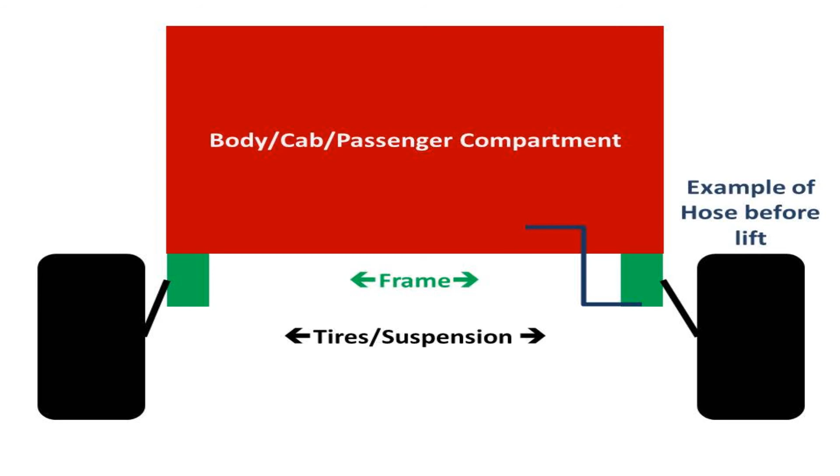You also have a little blue zigzag line there, and that's representing a generic hose that could be attached to something on the frame rail and also something that's attached to the body. So now I've jumped ahead to the next graphic here, and you see you still got the body and cab represented by the red block, but now instead of the green frame directly next to it, you have the blue blocks. And those are representing the body lift pucks, or body lift blocks as some may call them. So you're actually putting a spacer, a physical spacer, between the body and cab and the frame rails.

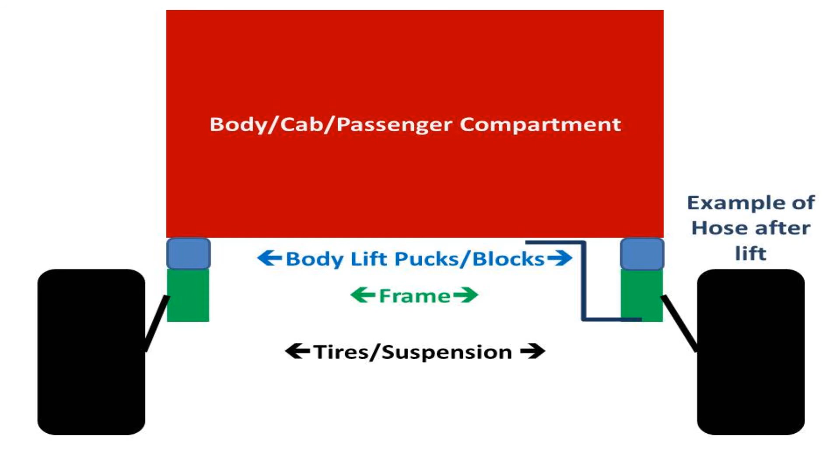So you can see with that same hose that was once connected to the body and the frame, now all of a sudden you have a 2-inch or a 3-inch gap between those pieces, depending on which size lift that you went with. So now that you conceptually understand what you're trying to do with the lift, you need to go ahead and start obtaining parts. You can order full-on kits from 4x4parts.com, or you can get a more basic kit from pnpengineering.com, which I can't necessarily recommend that you go with those, but it is an option.

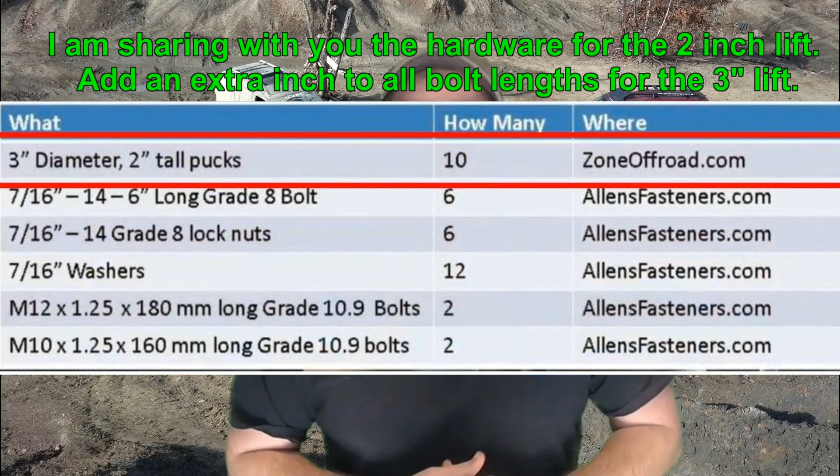I did a do-it-yourself kit, so I pieced it together because the heart of the kit is really just the blocks and extended hardware. So the first thing that you're going to need is 10 lift blocks. You have 10 body mounts, 5 on each side, so you need 10 total blocks. You want 3-inch diameter circle, and you want a 2-inch tall for the 2-inch lift or a 3-inch tall for the 3-inch lift. I did the 2-inch lift, so all of my tips and tricks are going to be specific to that. A lot of this is going to carry over to a 3-inch lift, but there might be other things that you have to take into account.

So the next thing that you need to get is the proper hardware. You need to get bolts that are essentially 2 inches longer or 3 inches longer to accommodate the extra distance between the body and the frame. So for 6 of the body mounts, you're going to want to make a quote-unquote bolt sandwich, as I'll call it. So you're going to want a bolt that is 7/16 inch in diameter and 6 inches long. I use a thread pitch of 14, but you're going to pair it with the proper lock nut anyway, so as long as the threads on the bolt and the nut that you purchase line up, then you're good to go. You're also going to want 2 washers for each of those bolts.

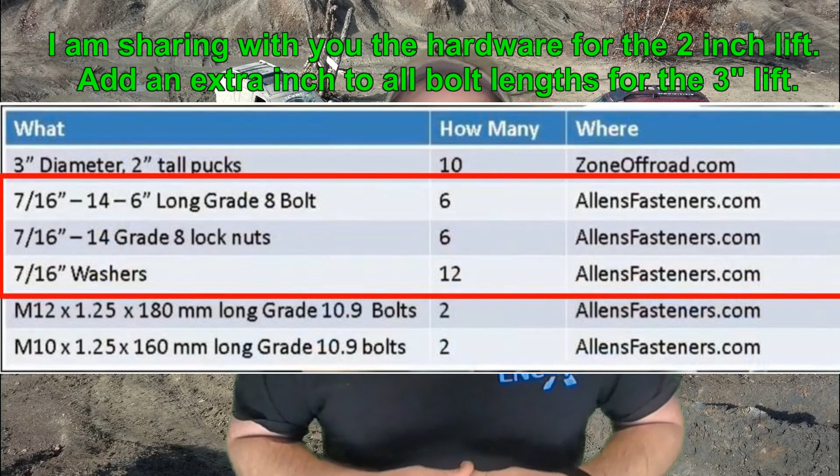So essentially you're going to have a washer right next to the bolt head, you're going to have the body lift block, and then you're going to have a washer on the bottom of the body lift block, and then you're going to have the lock nut on the bottom of the bolt, sandwiching it all together. Now for standard SAE hardware, you want to get grade 8, which is the strongest that you can get. You're going to need 2 metric bolts that are going to be M12, and that's going to be a 1.25 thread pitch. You're going to want it to be 180 millimeters long, and you want that to be grade 10.9, which is the metric equivalent of grade 8.

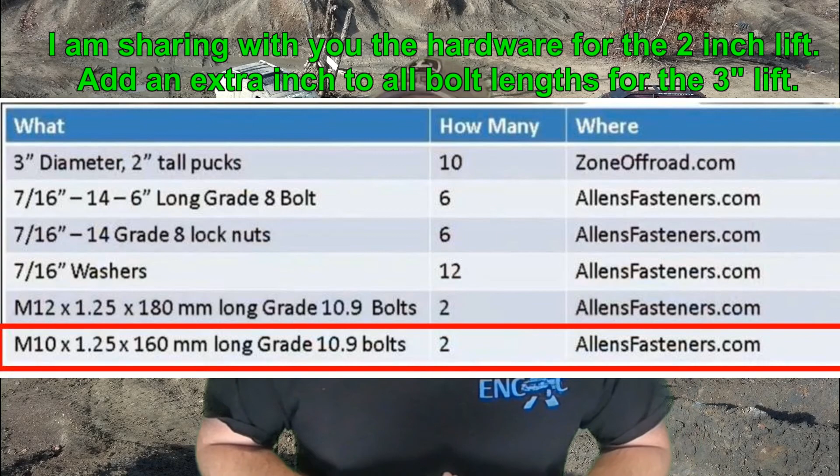It's the strongest metric hardware you can get. The last 2 bolts are also going to be metric, so they're going to be an M10, 1.25 thread pitch, that's the fine thread pitch, and then you're going to want 160 millimeters in length. Now these 2 bolts are going to thread directly into a welded nut somewhere in the body, so you don't need to buy corresponding hardware with that.

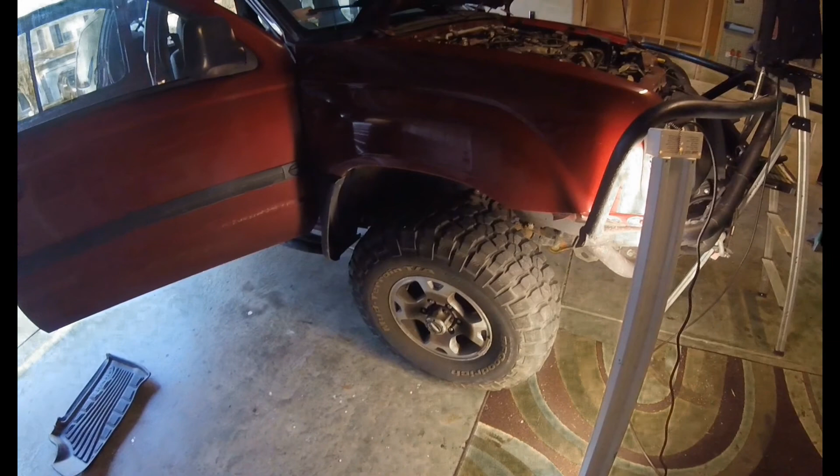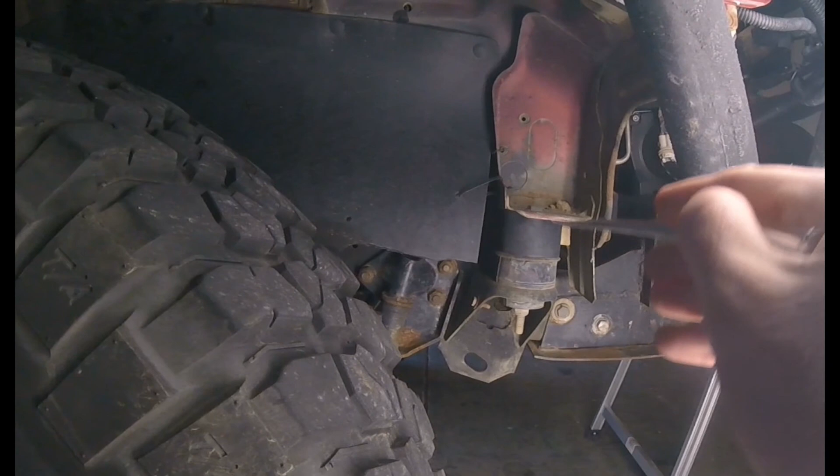So before you get to lift day, you want to go ahead and do some prep work. So first you want to familiarize yourself with where the body mounts are. Body mount 1 is going to be the one all the way on the front. It's easy to see on my truck since I have an open bumper, but it's going to be right here in front of your front tires. And the truck is symmetrical, so everything that's on the passenger side is also going to be on the driver's side. This mount right here has what I called earlier the bolt sandwich. It's a bolt with a washer that goes through the body mount, a washer on the bottom, and then the lock nut.

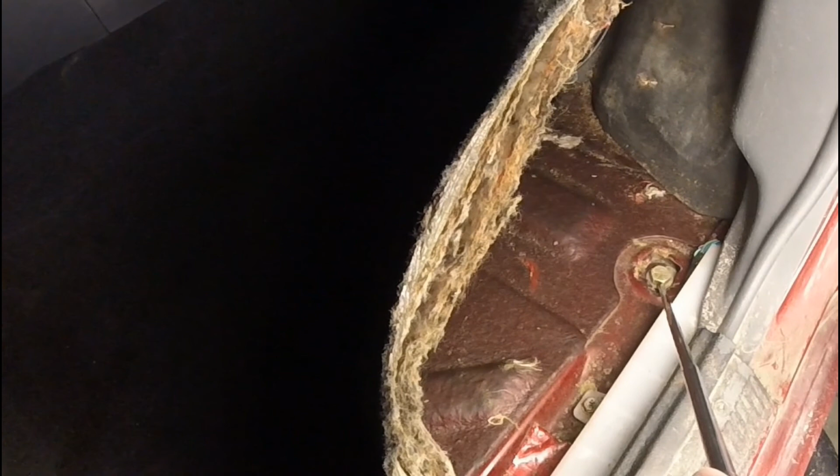Body mount number 2 is going to be in the floorboards of the front seat. So if you peel back the carpet, you can see a bolt head right here. Now, you can see the bolt head because I have removed the plastic cap. So before you even get started to the lift, make sure that you go ahead and peel your carpets back, and you might have to hammer or chisel out the plastic cap. It was a pretty tough plastic for me. But you need to get access to the bolt head. This mount will also have a bolt sandwich. You can see there's a bolt head and a washer right on top of it.

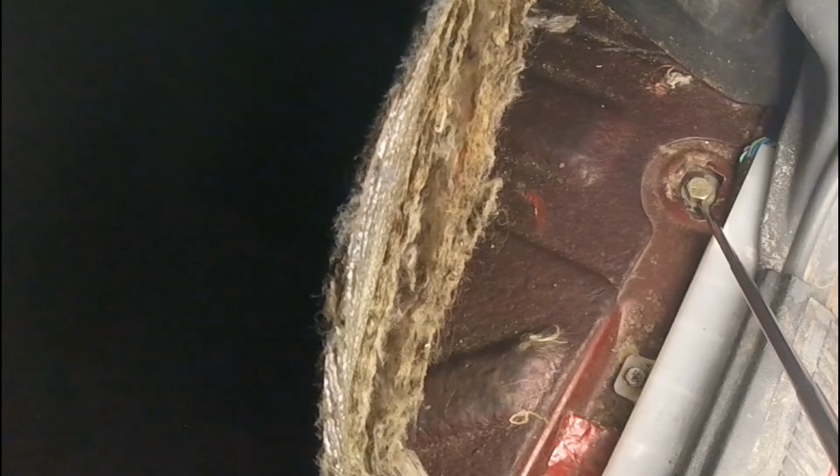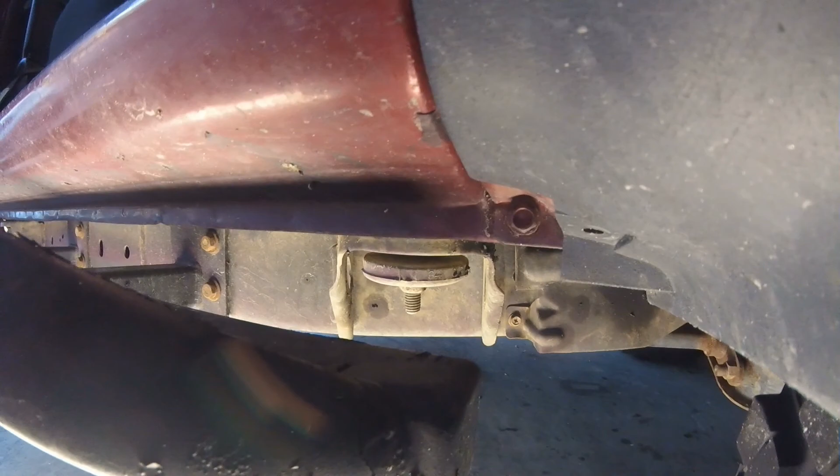So if you want to look at that same body mount from the outside of the vehicle, it's just right beneath where you saw it. It's right behind the front tires. It's right over my rock slider, right underneath the pinch seam here. And that's body mount number 2.

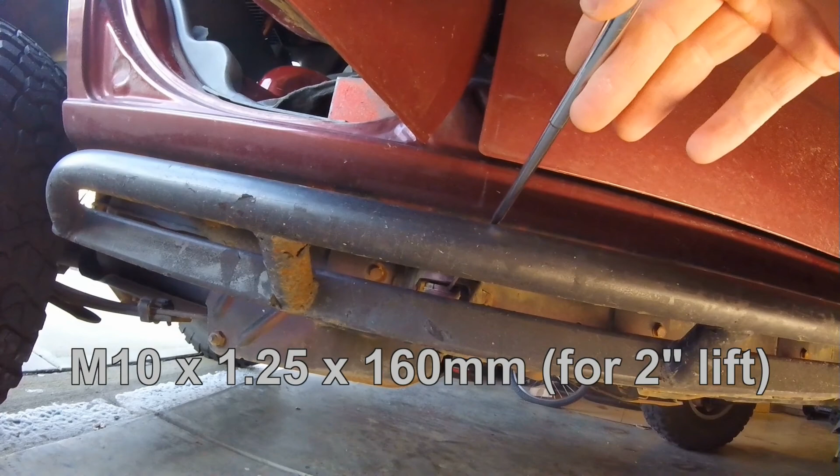Body mount number 3 is going to be right at the seam between your front and rear doors. This one is one of the metric bolts that will thread into the body itself. If you just go underneath and look up, you can see where that body mount is. This is the one you also got to look out for an extra bracket that could be in the way.

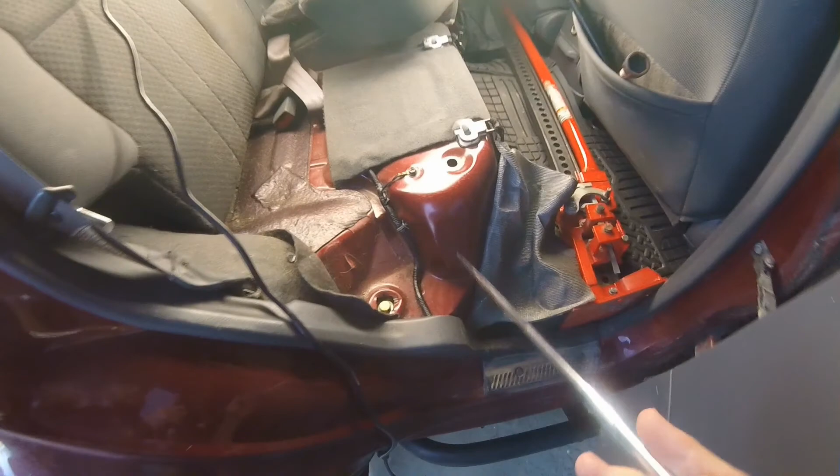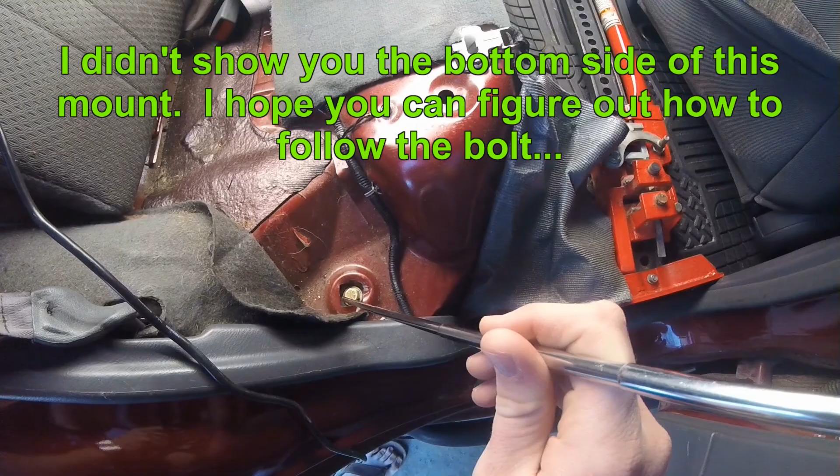Body mount number 4 is in the back seat. You're going to need to remove the seat cushion and peel back some carpet. And this also had a hard plastic cap on it. This mount will use a bolt sandwich, as I mentioned earlier. So there's a washer right up against the bolt head. The bolt's going to go through the body mount, and you're going to have a washer on the bottom and then the lock nut holding it all together.

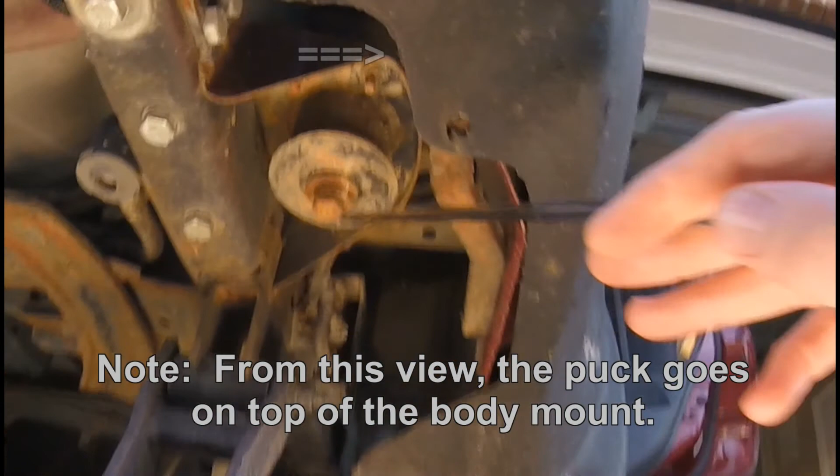Body mount number 5 is going to be right behind the rear tire, right next to the shackle to the right. If you look up, you can see where I've got a bolt head and a number of stacked washers there. This is one of the metric bolts, and it threads directly into the body.

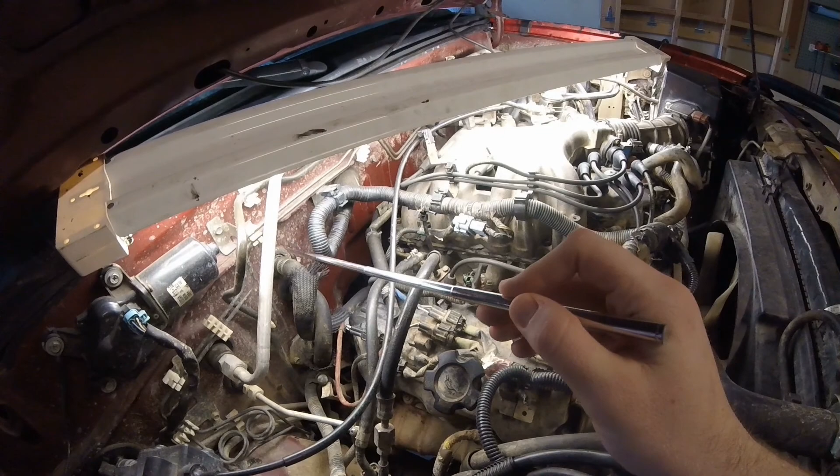So since I keep mentioning all the extra work of relocating things, how about I give you an actual list of what needs to be looked at or taken into consideration before doing the body lift. Number 1 is going to be the heater core hoses. That is on the back side of the engine bay, and they go into the heater core, which is underneath the glove box on the passenger side, and it goes down to the engine block, which is attached to the frame.

These two hoses have a plastic type clip that hold them together. You want to remove that clip to make sure the two hoses have enough room to freely flex back and forth. You want to make sure you are watching these locations as you are actually doing the lift. The inlet and outlet of that heater core are just plastic, and they will get brittle.

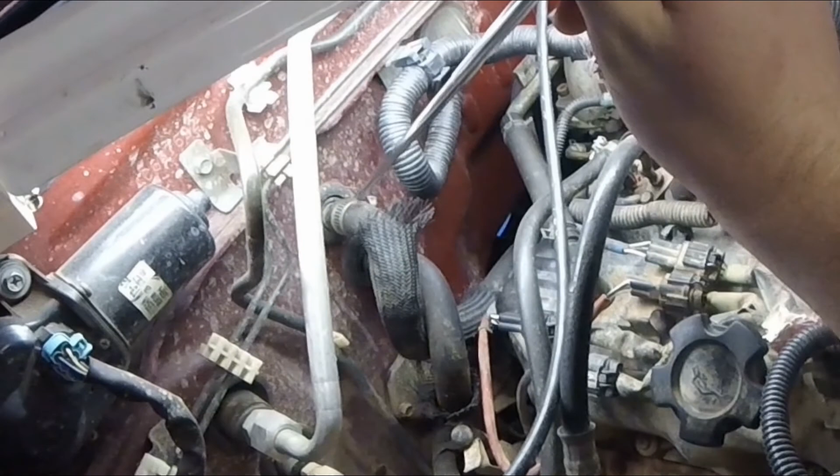And if you have any binding from these hoses in the clip, or if you have extra binding on here because of the way the clamps are put on, you can break off the inlet to that heater core, which means you're going to have to take apart your entire dash to replace it.

The next thing to look into is going to be the radiator. Now, I have my radiator relocated, and honestly, it's a pain in the ass. You have to take a grinder and cut off some of the sheet metal on the bottom side of the radiator that's attached to the radiator support. And then you have to weld or bolt or screw or find some way to attach a piece of angle iron, basically, that drops down 2 inches.

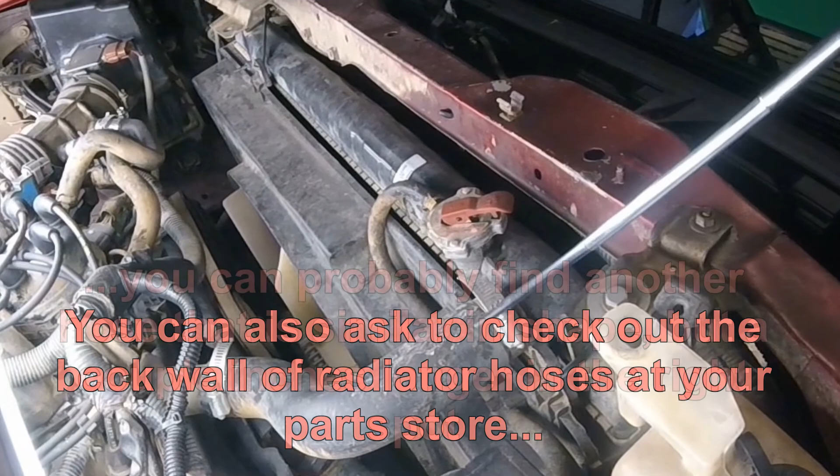At the bare minimum, you need to at least loosen up the clamp and just break free the bind of the inside of the hose to the outside of that radiator inlet. Now, I had my radiator non-relocated for 3 years, and I had no issues other than it kind of sat crooked in the engine bay.

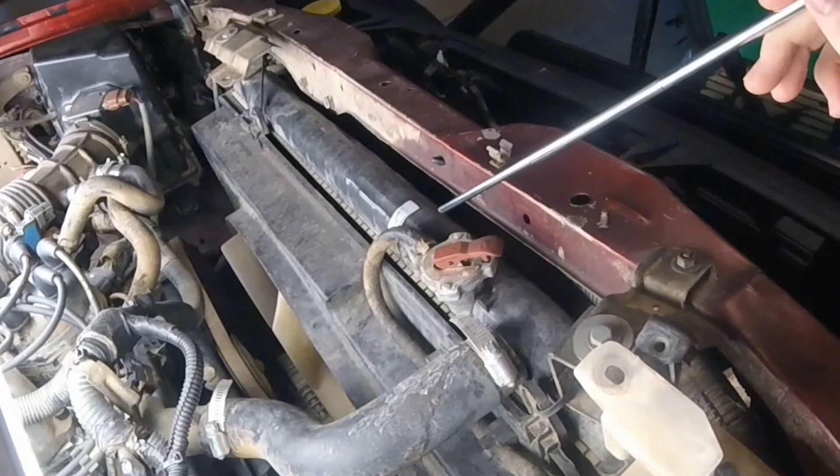But you don't want to have stress on the hose or the clamps as you're lifting the truck, because that can cause you to break off the inlet to your radiator. Because like the heater core, it's a plastic inlet, and it's not fun to have to replace something because you didn't think to look at it ahead of time.

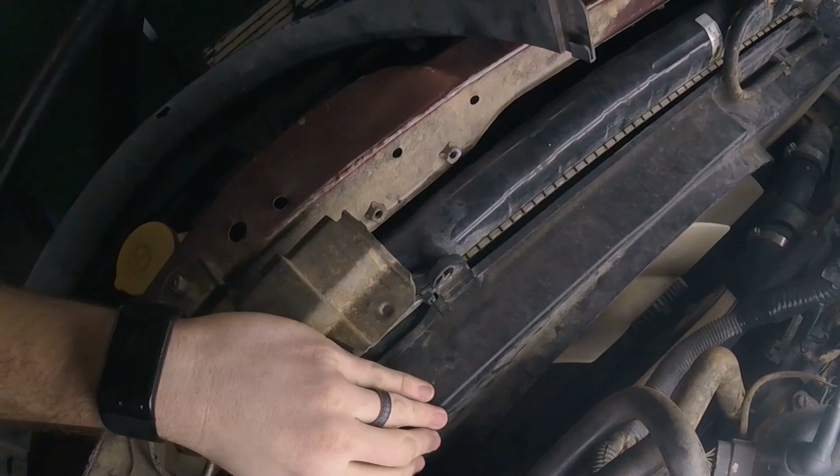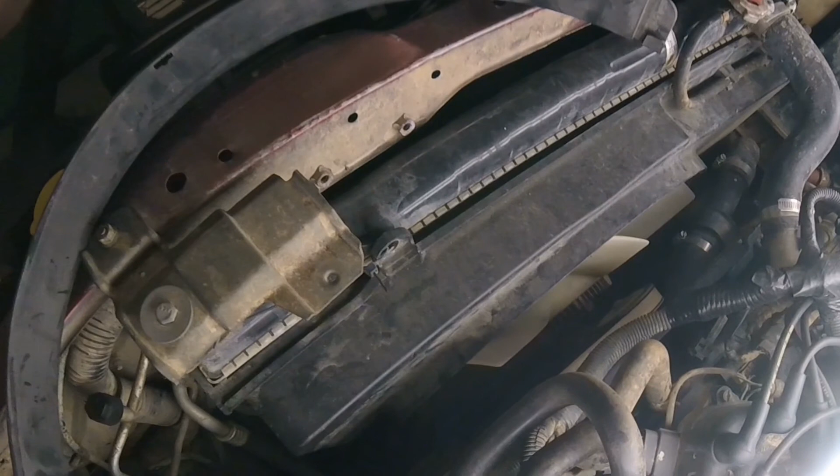So the radiator is obviously mounted to the body, but so is the fan shroud, since that's mounted to the radiator. But the fan itself is attached to the crankshaft on the engine. So on this shroud is a lower half circle piece of plastic, and you need to remove that, because otherwise when you bring the fan shroud and the radiator up, that fan is going to rub on this bottom piece of plastic. So I just removed this little lower shroud, and I never bothered putting it back on.

Even after I relocated my radiator, I could theoretically put it back on. I just haven't gotten the motivation to go through with clipping a little piece of plastic on. But you want to make sure you remove that before you start lifting your truck.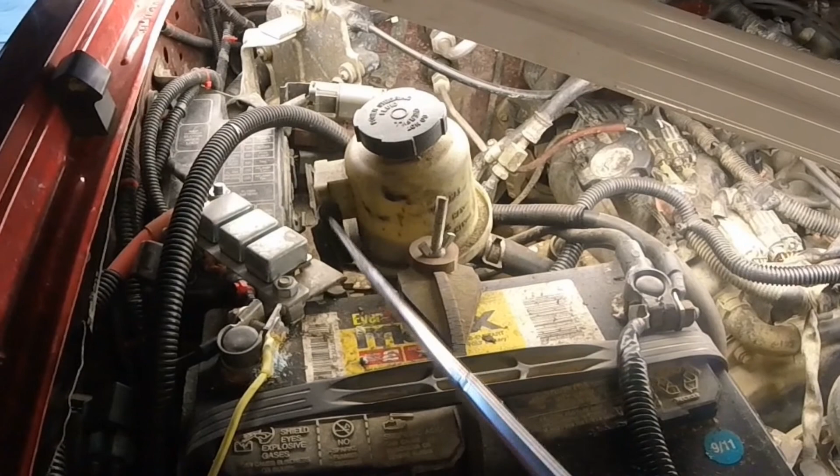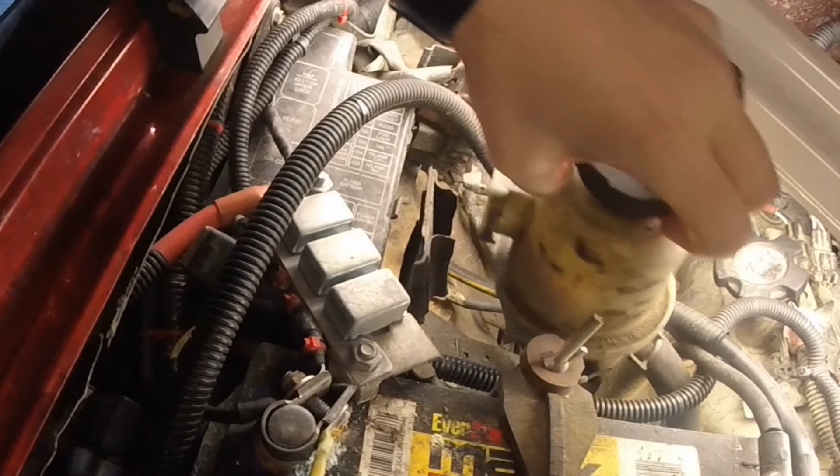The power steering reservoir right behind the battery is attached to a bracket here that is bolted to the inside of the fender. The bottom of the hose goes to a hard line on the frame. All you really need to do is just lift it up and out of the bracket while you do the lift, and then see what type of slack you have in the hoses when you're done.

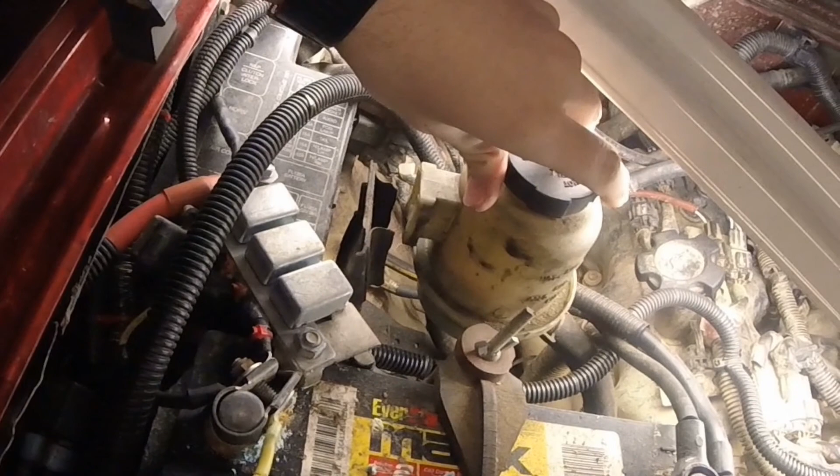For about 3 years before I relocated this bracket, I just left the reservoir loose, and I just used a zip tie to hold it out of the way. It had no functional problems, but I eventually decided to shorten the bracket and drop it lower to the fender.

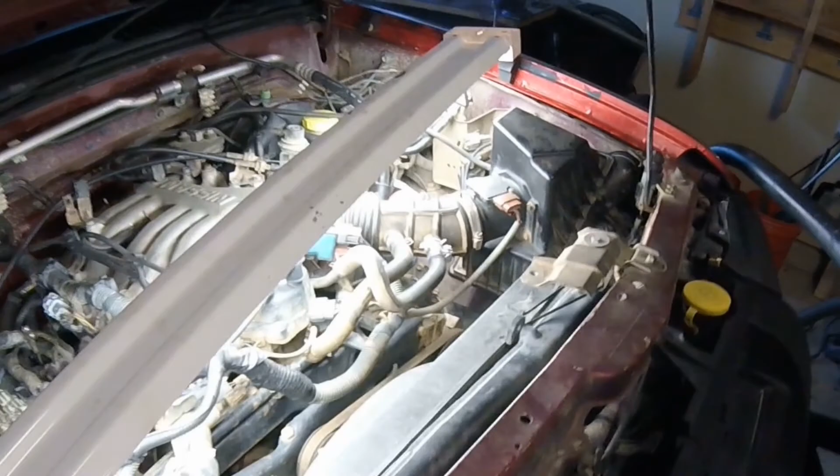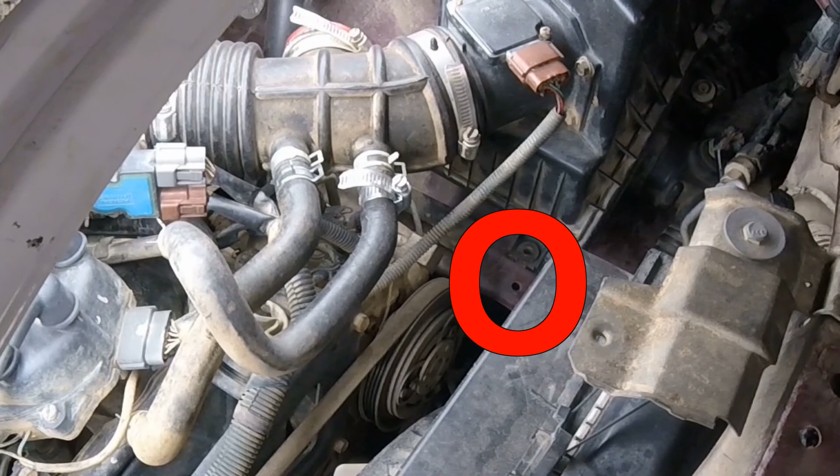The air intake hose that goes to the intake manifold is of course attached to the engine on one side, but then it attaches to the air box on the other. The air box has 3 brackets that hold it to the fender. I removed one of the 3 brackets to allow the air box to have a little bit more flexing so that it could stay better aligned.

While you're doing the lift, you're going to want to loosen up the hose clamps on it so that hose can slide around, and once you're done lifting the cab, then you want to go back and readjust any hoses and tighten down the clamps.

So on both of the front tires, you're going to have these fender liners here. Well, they're no longer going to fit. And what I have here is actually what they call gap guards, which I spent way too much money on from 4x4parts.com, and they don't look good and they didn't fit good. So I would just recommend taking off the fender liner here and just leave it open. It'll probably help with engine cooling too, since you can actually dump heat out of the engine bay instead of having it contained.

But you will have more mud and water splashing into your engine compartment when you're off-road. So go ahead and look on the driver's side of the engine bay and try and look down underneath the brake fluid reservoir. Follow it down a little bit further. It's kind of hard to see back here, but this is the steering shaft. It comes out of the steering column of the steering wheel and it goes into the steering gear.

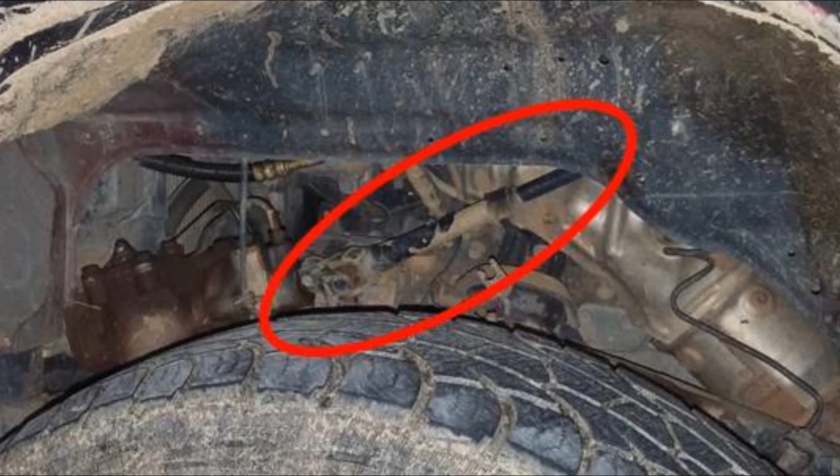You're going to want to loosen up these bolts before you do the lift, and that way as you lift the truck, the spline shafts can actually lengthen and readjust itself within those collars. So this is just a collar, so you want to loosen up the bolt so the spline shaft can slide. The bottom side of the steering shaft has a bolt that is easy to access from the fender well once you peel back the liner.

So if you peek behind the front passenger side tire, you'll see this steel bracket here, and that's a shield that's protecting the brake lines. You can see my brake line is unclipped from this brace, and that brace or bracket is bolted to the frame rail. So you want to remove this shield and you want to unclip your brake lines and just make sure that they're not going to be bound up or pulling on itself as you do the lift.

I put the shield back on when I was done, and I just had to unclip one line from the bracket here to make sure that it was in its free state. If you follow these lines all the way back on the frame rails, there are other clips that are bolted to the frame, and it's good practice to go ahead and unbolt those while you're doing the lift, and then evaluate how much slack you have in the lines before bolting them back.

So similar to the brake lines on the passenger side of the frame rails, on the driver's side frame rail, there is a similar type bracket about midway down the vehicle that will have the emergency brake cable on it. That's a good thing to just loosen up and unbolt it so that it has some free rein to move as you're doing the lift, and then reevaluate how much slack you have on the cable before reattaching it.

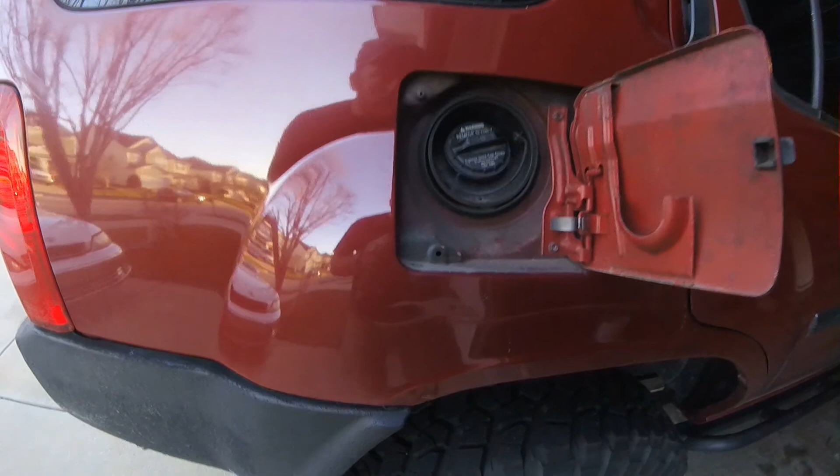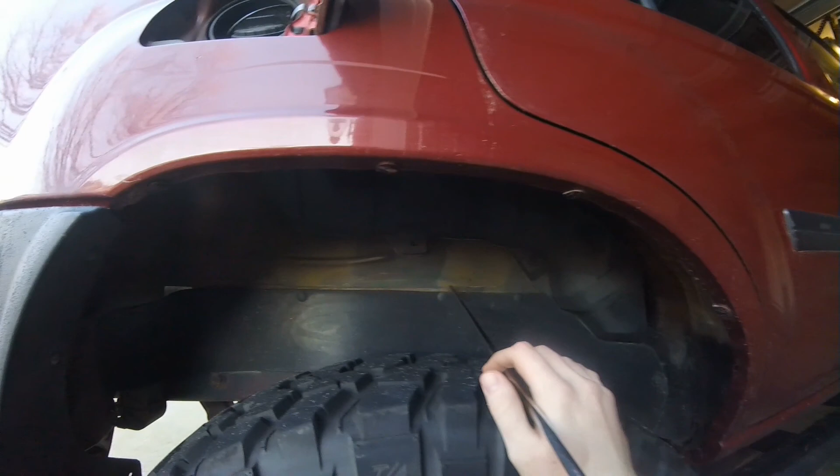One thing that you may want to keep an eye on is going to be the gas fill tube. So behind your actual gas fill port is going to be a hose, and that's going to come down here, and that'll eventually go to the tank. So the tank is frame mounted, and of course your fill port is going to be body mounted. I didn't have any issues with this, but it's something you just want to keep an eye out while you're lifting the cab to make sure that it's not pulling off of one end.

So somewhere under the truck, right around the drive shaft where it connects to the transmission, is what they call the drive shaft safety hoop. This is just a hoop that bolts on to part of the body, and it loops down underneath the drive shaft. The sole purpose of it is to catch a drive shaft if for some reason the yoke on the drive shaft to the transmission breaks off, so that way you don't go pole vaulting your truck.

You can extend the hardware by putting a 2-inch spacer, some type of bushing or a sleeve on it, and extending that loop down. I ended up just taking it off. I've never had any concern at all about losing a drive shaft.

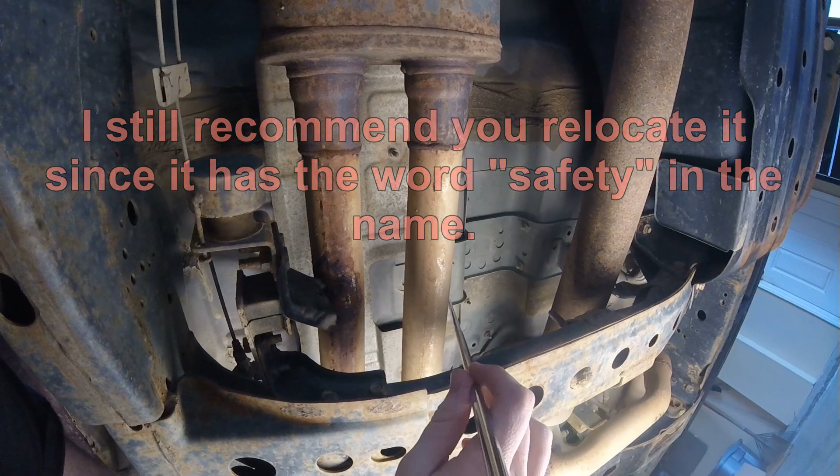Now, one more thing to look out for is going to be in body mount number 3. Some vehicles have an extra bracket that's just a little piece of steel that bolts to the body mount on the frame, and it bolts that to the actual body itself. You're going to need to check for that bracket and make sure it's not going to bind anything up.

You can just take the bracket off while you're doing the lift, and then you can just buy some generic bar stock at Lowe's or Home Depot, and you can drill a couple holes and cut it to length if you have an angle grinder or a sawzall or anything like that.

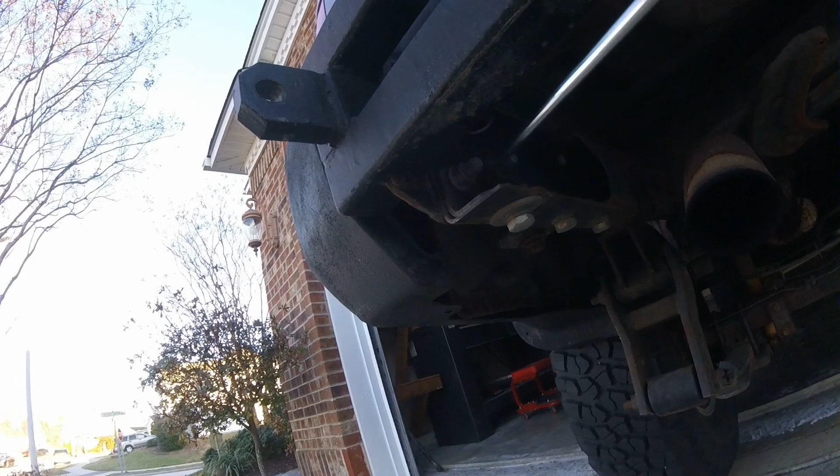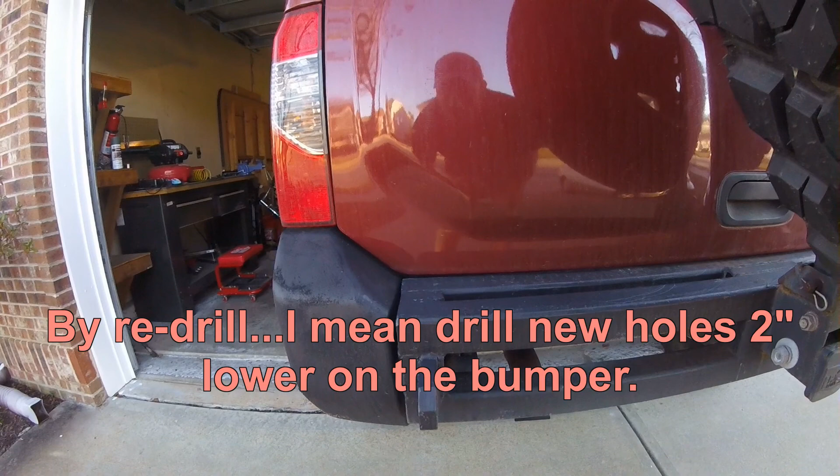So if you look at the rear bumper here, it's bolted to the frame rails. And that means that as the body goes up, you're going to have to shift your bumper up on those mounts. Now I have a custom bumper, so I just built it to be the correct height. But if you have a 1/2-inch drill bit that is capable of drilling through steel, you can remove your rear bumper and you can actually just re-drill holes that will line up with the existing mounts, and that'll cause your bumper to shift up and stay lined up with the body. That's the easiest way if you have the stock bumper.

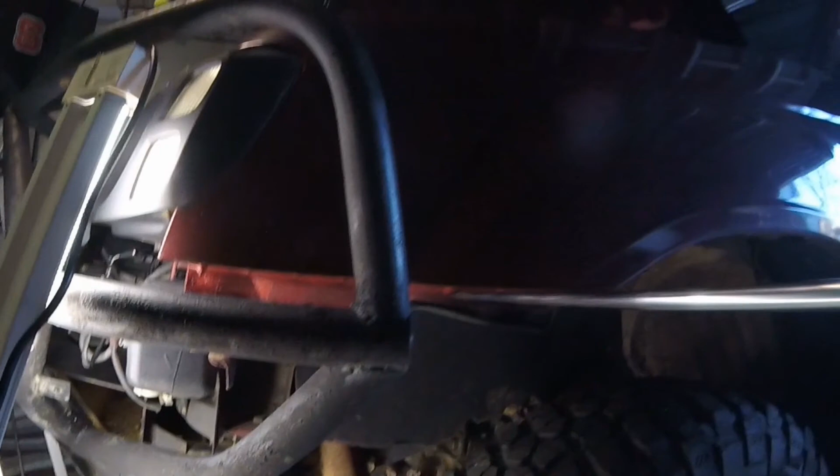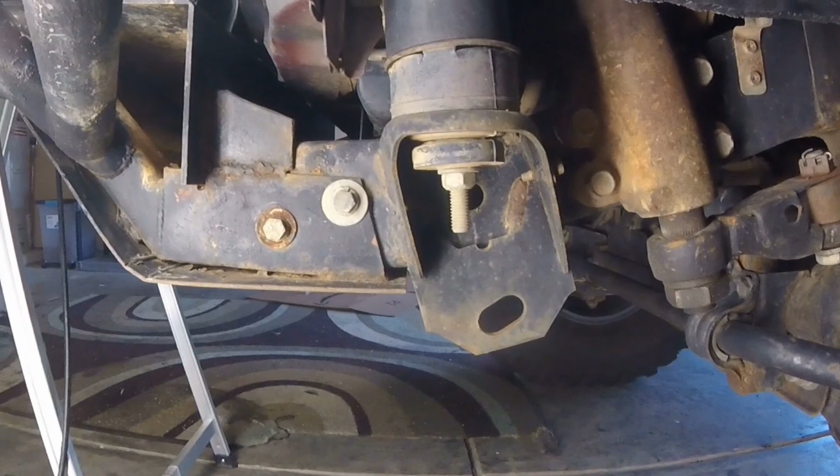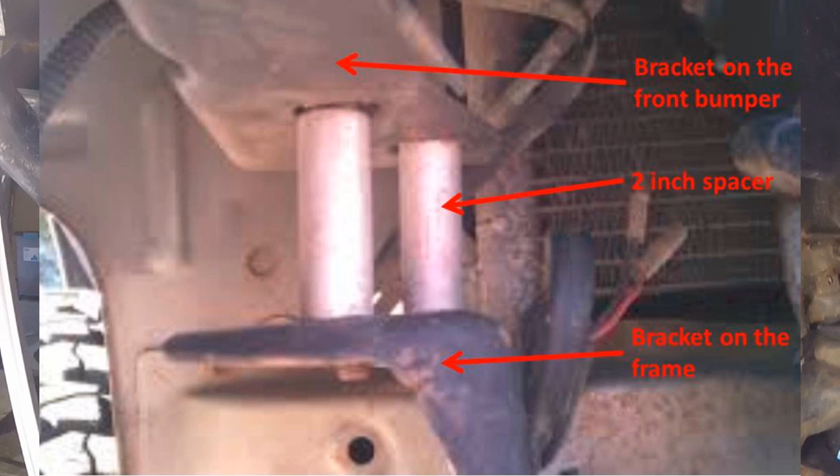So the front bumper is mounted on the frame, and it's supposed to line up with the fenders up here, which are going to be body mounted. So you're going to need a method for relocating your bumper and raising it up 2 inches. Now, of course, mine is a custom off-road bumper, but the easiest way to relocate your front bumper is to take some 2-inch square tubing and drill some holes through it, and that can line up with the existing mounts on where the stock bumper is mounted, and that'll just space the entire bumper upwards.

The last thing to look out for is going to be your transfer case shifter. The shifter goes directly into the transfer case, which is mounted to the frame, but it has to stick through a hole in the body in order for you to reach the control. Because you're spacing the body upwards, you might not be able to reach for low. In my truck, all I did was remove this little plastic trim and take a look underneath the shifter lever here, and there's a big rubber boot that gets in the way and was blocking access for the lever to go all the way back.

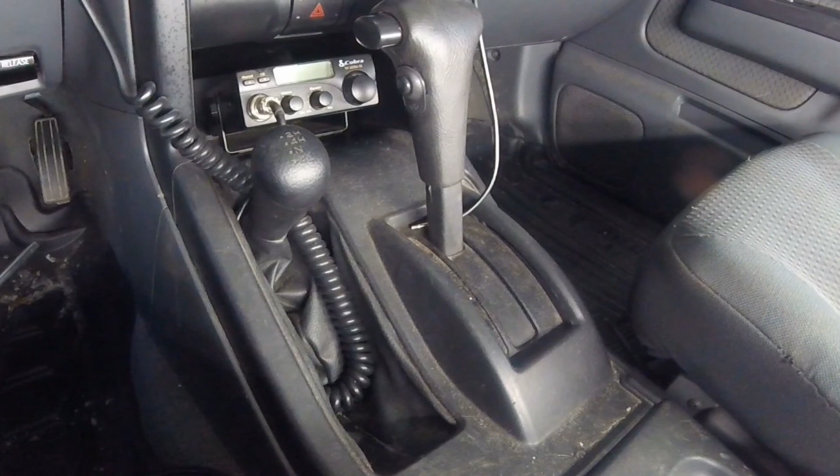Some people have had to take a Dremel to the actual hole behind the transfer case to make sure they can shift all the way into 4 low. But I found on my truck it was just the rubber bunching up, and I just cut some out of the way, and it's been fine ever since.

So now that you're familiar with the task at hand, and where all the body mount locations are, go ahead and start doing some prep work before you even get to lift day. Go ahead and break out those plastic covers that are keeping you from getting a wrench on the body mounts. Go ahead and spray anything you can with PB Blaster, any of the body mounts, and then also you're going to want to spray the spline shafts on the steering column, both the upper and lower junction. Cosmetic things such as the front bumper can easily be removed ahead of time, and go ahead and figure out how you're going to relocate it.

Go ahead and have a plan for what you're going to do, whether it's relocating something, getting a longer hose, or just zip tying your power steering reservoir off to the side like I did. You know, a lot of my relocations, I did that several years after just because I wanted to have a bit of a neater engine bay. It's not necessarily required for the lift, but you just got to understand what you're doing. I sprayed PB Blaster on all of my body mounts every day for about 2 weeks before I even did the lift. It did make it quite a bit easier though to break that hardware loose.

I even recommend putting a wrench on all of your body mounts before you even go to lift day, so that way if you know you're going to have some stubborn hardware, you know about it ahead of time, or you can wait to spray it with more PB Blaster, or make sure that you have a strong enough wrench or a breaker bar to get those body mounts loose. Doing as much of the prep work as you can ahead of time will make it a lot easier on lift day, so that you can actually spend the time lifting the truck and not dealing with all of the other odds and ends.